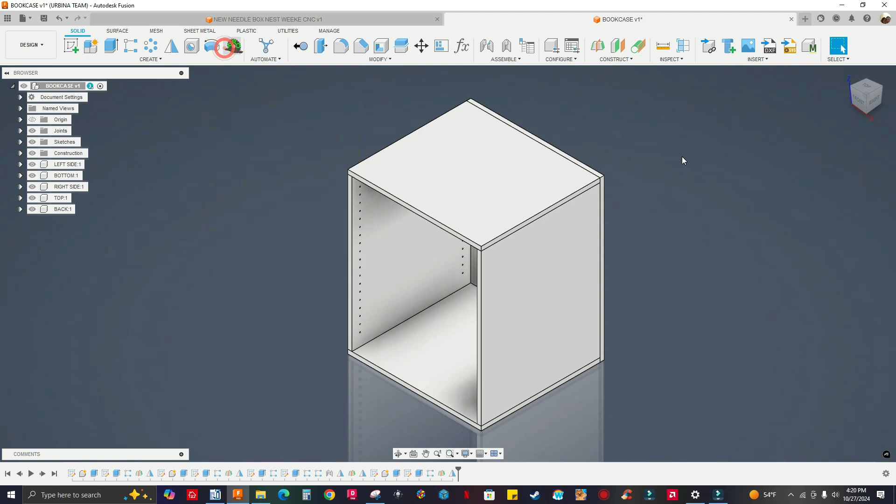Let me select MapBoards Pro. I'm gonna size the sheet 4 by 9 - excuse me, 4 by 8. Should be 48, not 49. 4 by 8. Okay, I'm going to options.

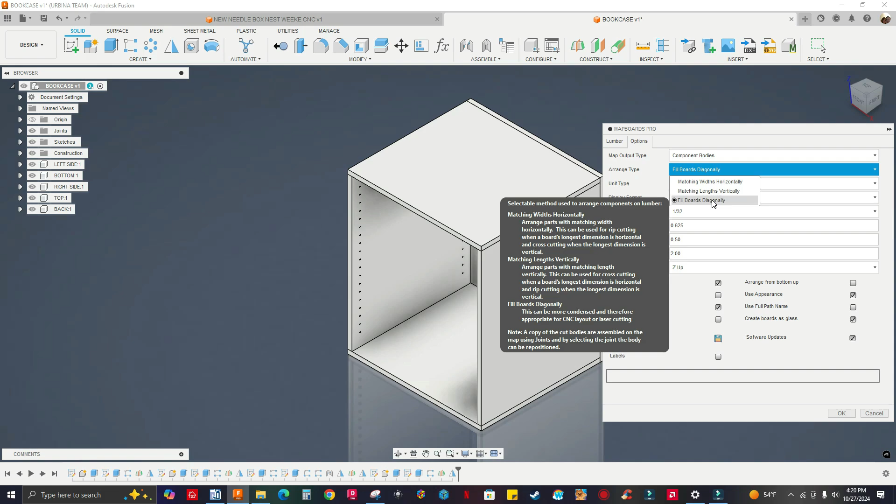I got everything saved as default. The map output type is component bodies, and then I have arrange type fill boards diagonally. This is for CNC or laser cutting.

And everything else is here: 5/8 spacing for component spacing. I have the trim on board edge, half an inch, and then the space between boards is 2 inches. Everything else is checked.

So when you have everything that you want, you can just save as user default. So next time you open MapBoards Pro, you're gonna have everything there. You don't have to make changes again.

Let's go to options and let's create labels for this part. Let's say I want to do a cut list - save cut list. I'm gonna select a different font, it's gonna be Arial Black. I'm gonna increase the dimensions height to 2 centimeters.

And then component label height is gonna be the same, and the same for board label height. What else do I have to do here? That's it. So let me click OK.

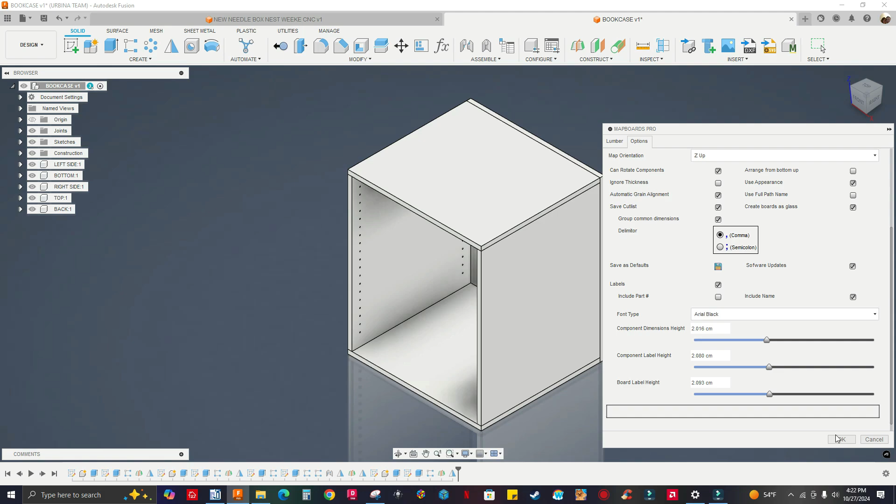I gotta save this cut list. It's gonna save it as a CSV file. So save. Now it's creating the map, and there it is.

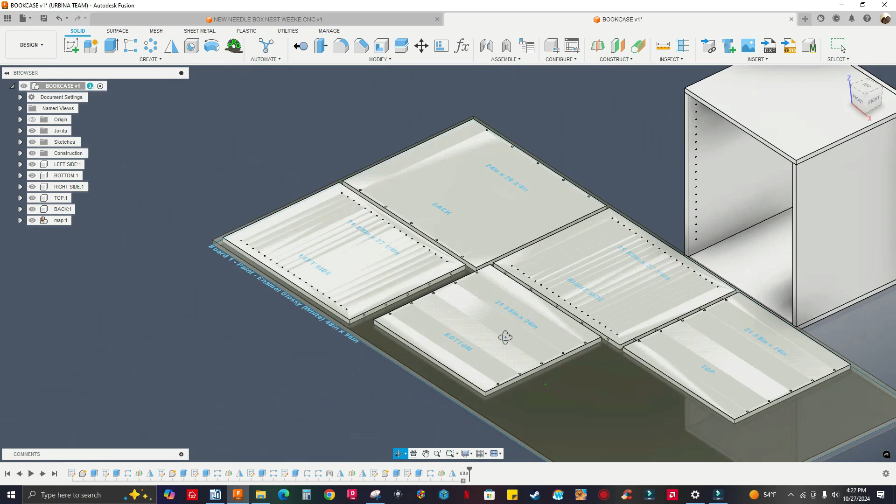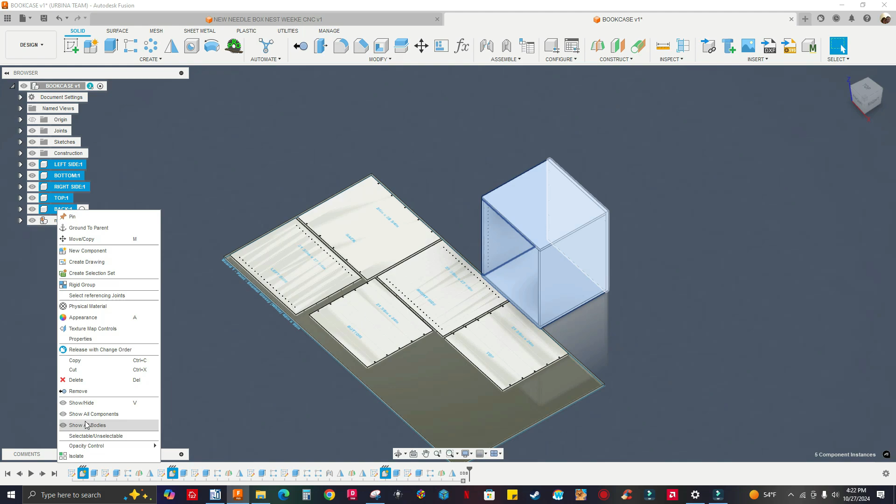Okay, there it is. So I can turn off the bookcase if I want to, and select every single component here. Select the first one, left side, hold down Shift, select back, right click, and just show/hide. Or you can select map one and then isolate. I do this when you have a lot of components to turn off, so I just isolate map one. It's just faster like that.

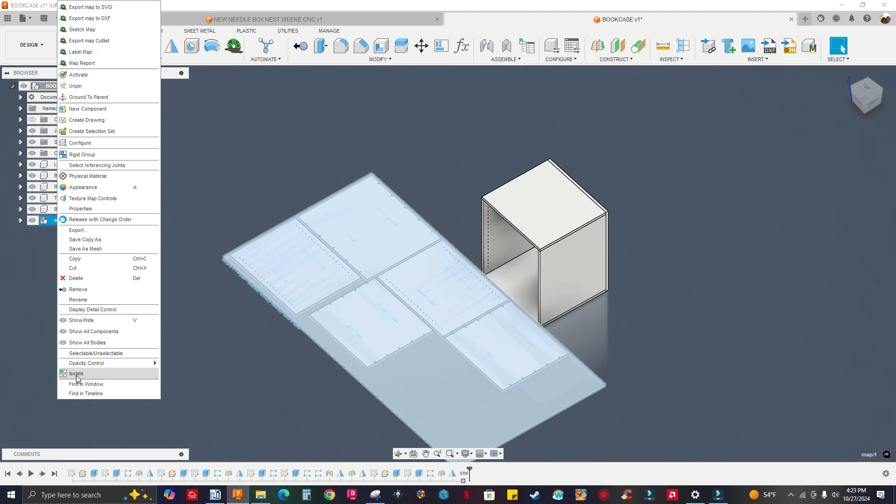Let me isolate map one. I just want to see this part laying flat. And you see the labels on the parts. Okay, that's great.

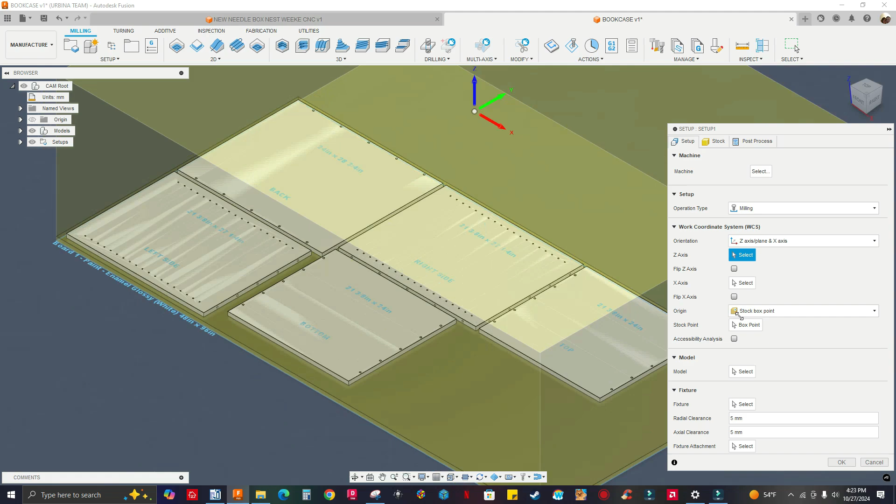Now let's go to manufacture workspace, and I'm gonna create a setup. I'm gonna do the back first. So I'm gonna go down to model, click on select, select the back, go back to Z-axis. But before that, orientation - I'm gonna go from X-axis to Y-axis, the second one here. So what's my Z-axis? This face.

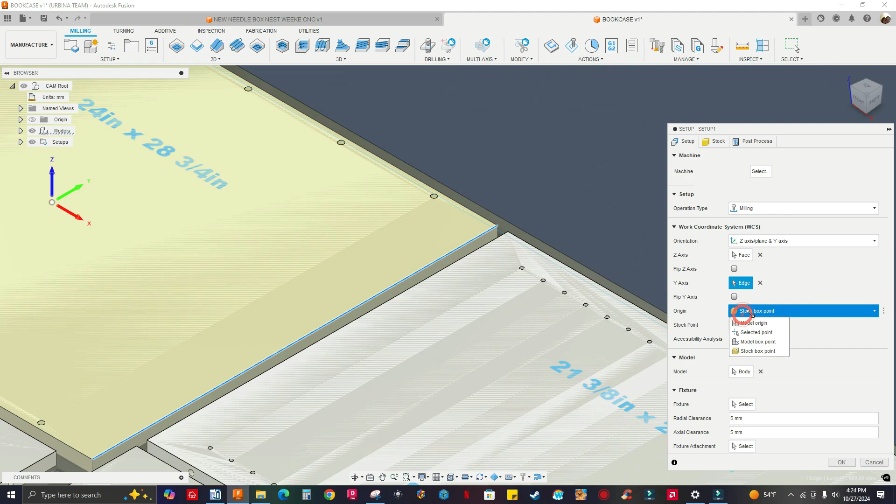My Y-axis, this edge. I got stock box point, select it, click on box point, zoom in. I'm gonna select this point right there. I'm gonna have to flip the Y-axis arrow - just click on it to flip it, or you can just check on this box to flip it as well.

Next, stock - this is the size of the part. See, my manufacturer workspace is in millimeters. I'll change it to inches in a minute. Let's go to post process.

I'm gonna name the program back. I could type any program comment - let's say 10 millimeter. Oops, 8 millimeter holes. Click OK.

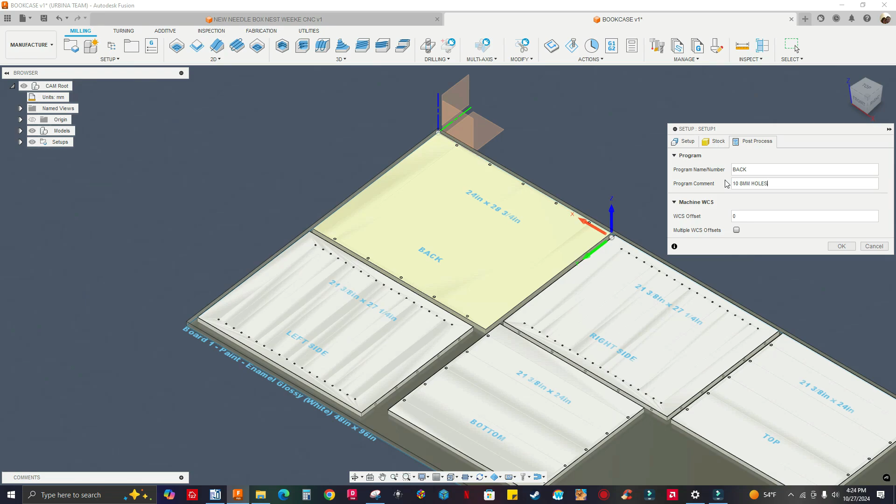Yeah, these are 8 millimeter. Let me check - select that edge, that hole. I'm zooming now, see, you see the bottom right on the screen is 8 millimeters. Okay, I can rename the setup one to back. Hit enter.

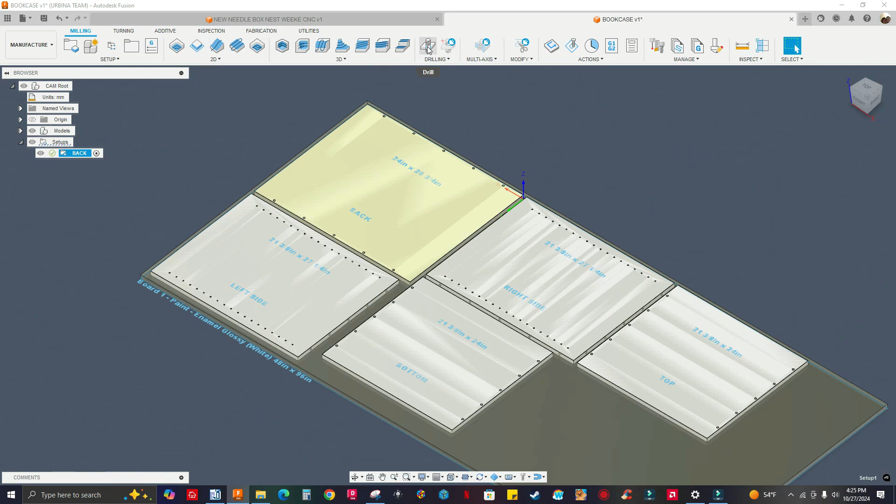Okay, now it's just drilling. Let me go to drill, go to drilling here. Drill, select my tool. Let's go to Weeke drill bits, brad point. Let me get that 8 millimeter brad point. Select, go to geometry.

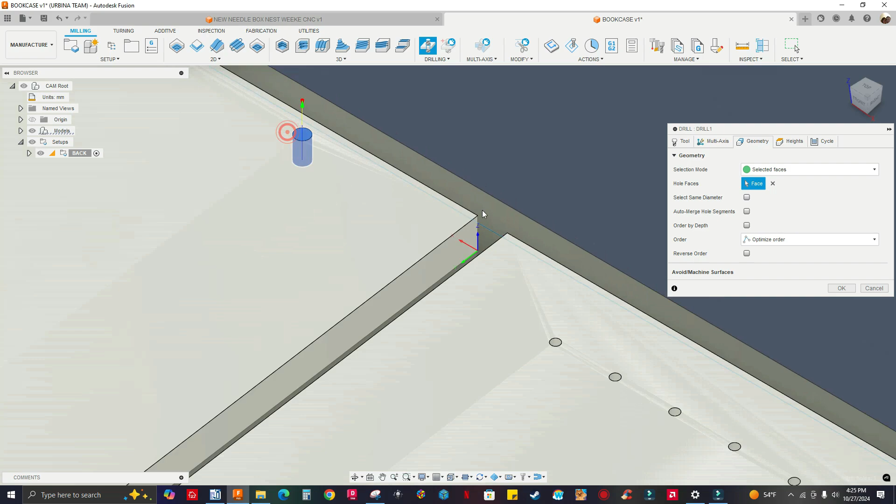I'm gonna select a hole face, that one. I'm gonna check this box right next to select same diameter. Next, heights tab, nothing to change here. Cycle type, this is the one that I use all the time. Drilling, rapid out. So let me click OK.

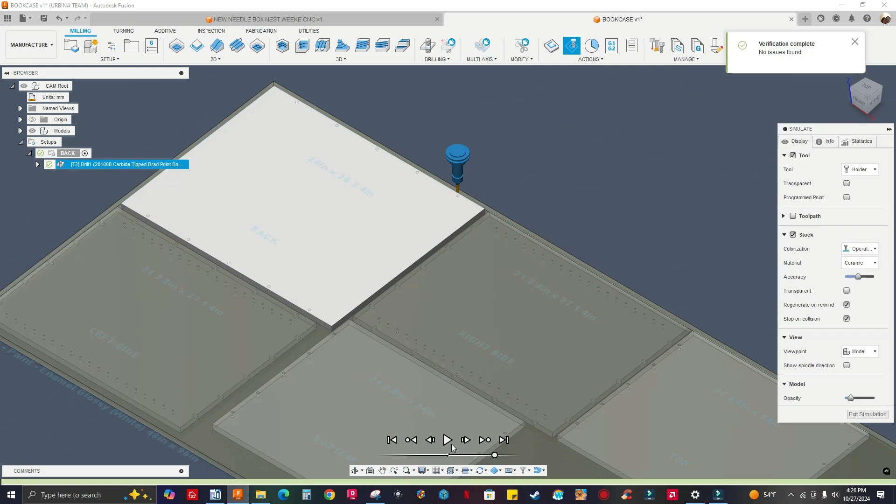And that's my first program. I'm gonna right click, simulate. That's it. Okay, let's go to the next one.

As you can see, the top and the bottom are the same because the holes are in the center. So I only need one program to make both bottom and top panels. So I can just turn this one off here. I just need one side panel to program, and that's for both right and left side panels.

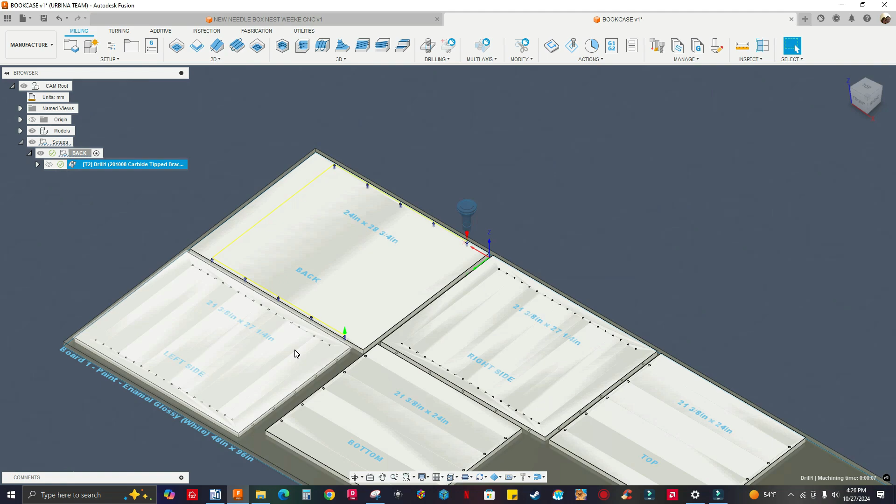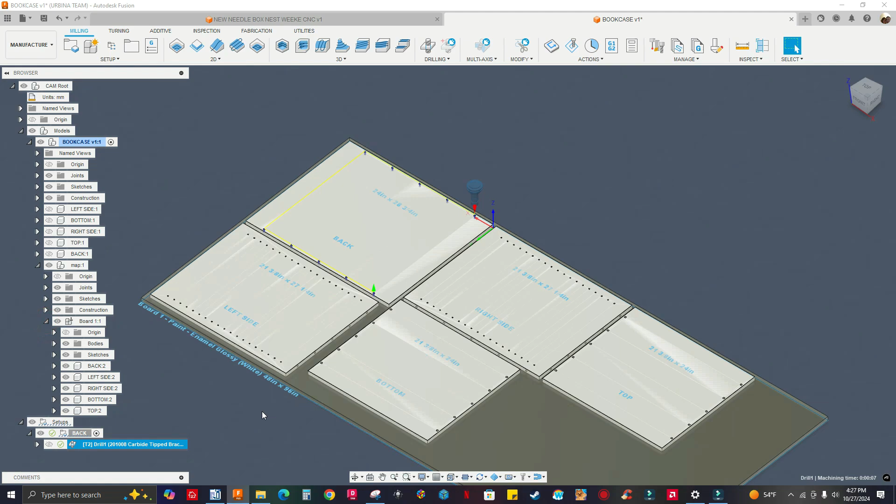So I'm gonna turn off this bottom right here and this side panel here. I can just go to models next to bookcase, click on this arrow to expand that. Let me go to map one, click on this arrow, let me go to board one, and I'm gonna have to turn off the bottom. Turn that off, and on the right side, right here, turn that off as well.

Let's say you don't want to see these labels. Just go to sketches, actually board one right here, and go to sketches. Click on the arrow to expand, just turn everything off. Okay.

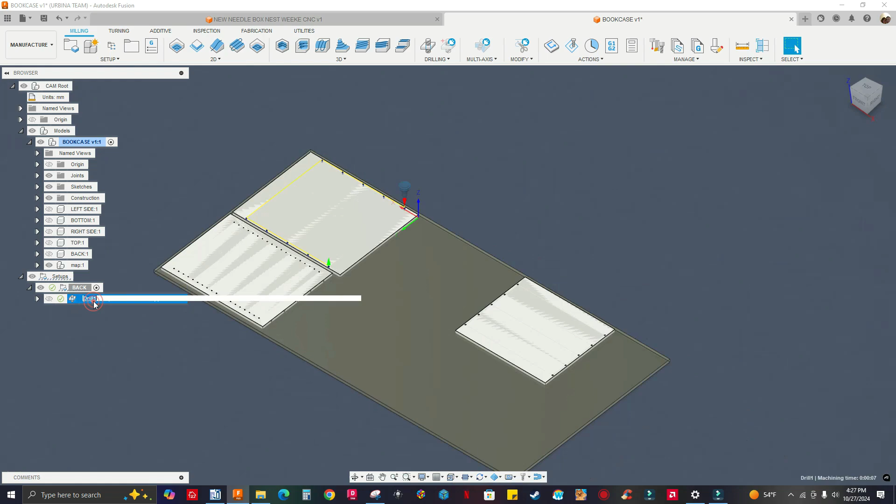Now let me program the side panel. You see, it has horizontal drilling. You see in the back, in the top or bottom, because this panel can be flipped, or it could be a left or a right.

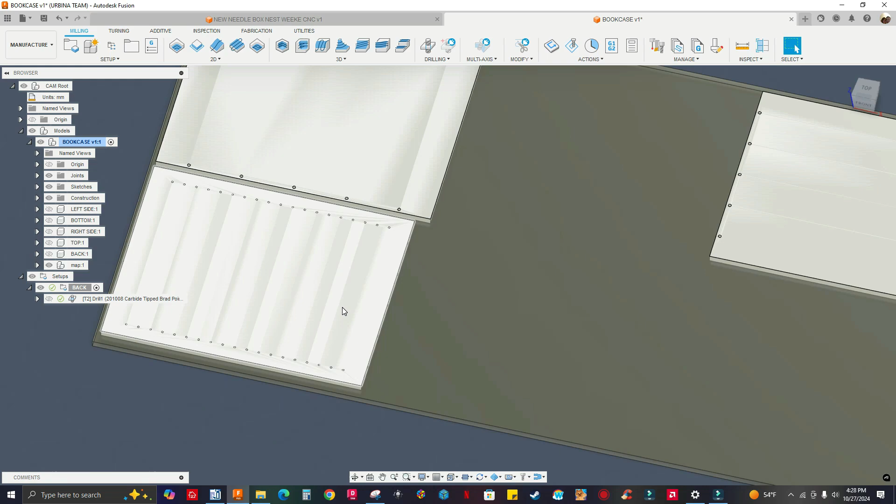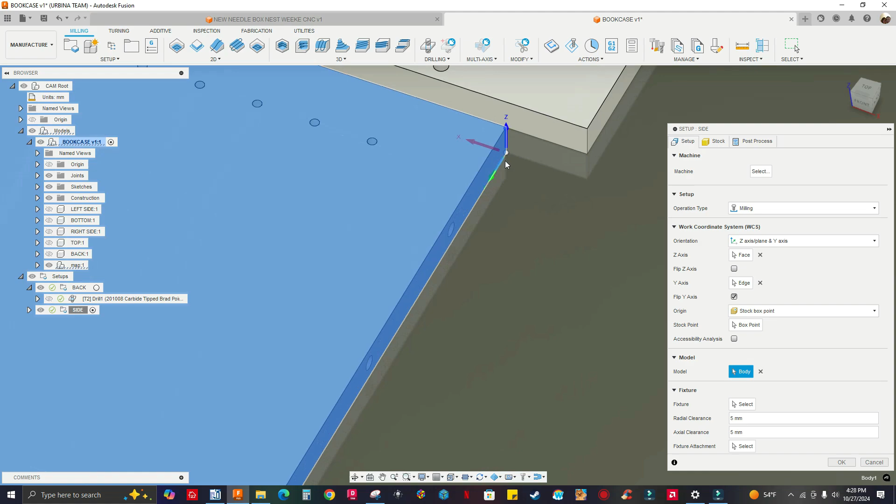So let me select back, setup, right click, duplicate, select that. I'm gonna rename it side. Hit enter, right click, edit. Right next to model, click on this X, select the model. That's where my WCS, this is where I want my WCS to be, right there. So I don't have to select Z axis or Y axis, they're on the same plane.

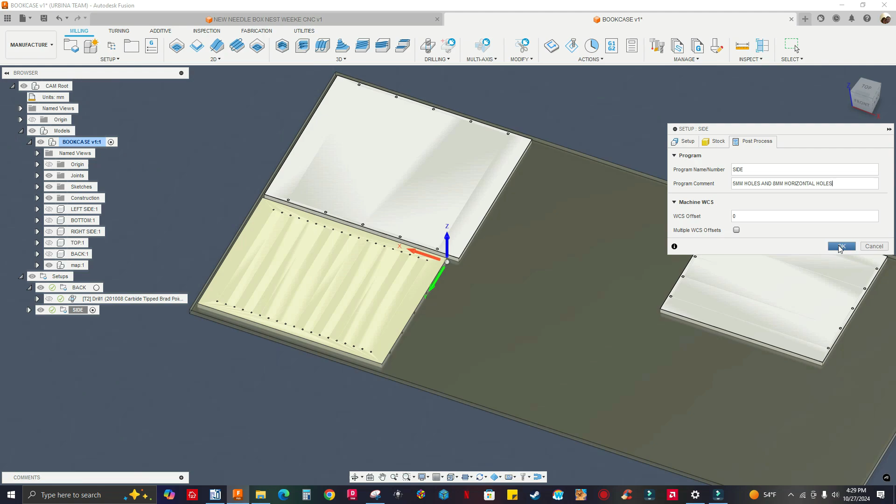So let me go to post process. I'm gonna name the program side. I can say 5 millimeter holes and an 8 millimeter horizontal holes. Okay, click OK. I'm gonna click on this arrow to expand that.

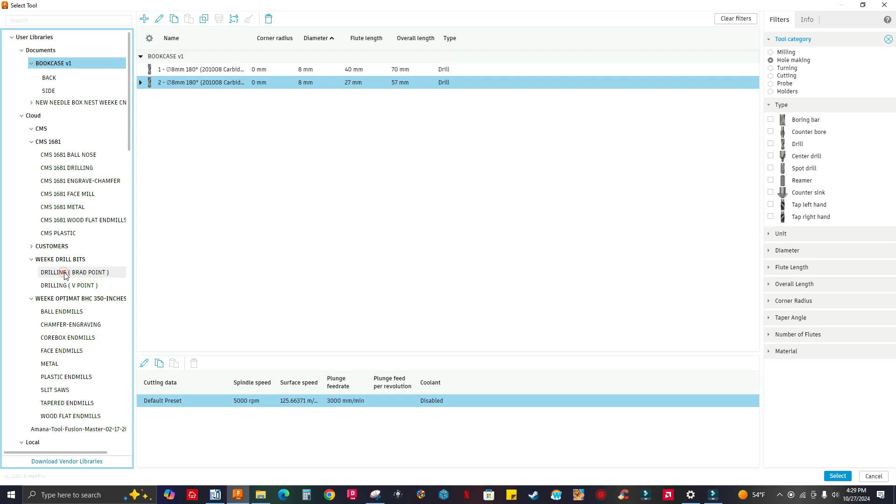Select that drill. I'm gonna use vertical drilling, but I gotta change my drill from 8 millimeters to 5 millimeters. So right click, edit, select my tool. Let's go to that drilling brad point under Weeke drill bits. Let me get 5 millimeter brad point.

Select, go to geometry, click on this X right next to faces. Zoom in, select this face. Okay, let me click OK. Now let's do horizontal drilling.

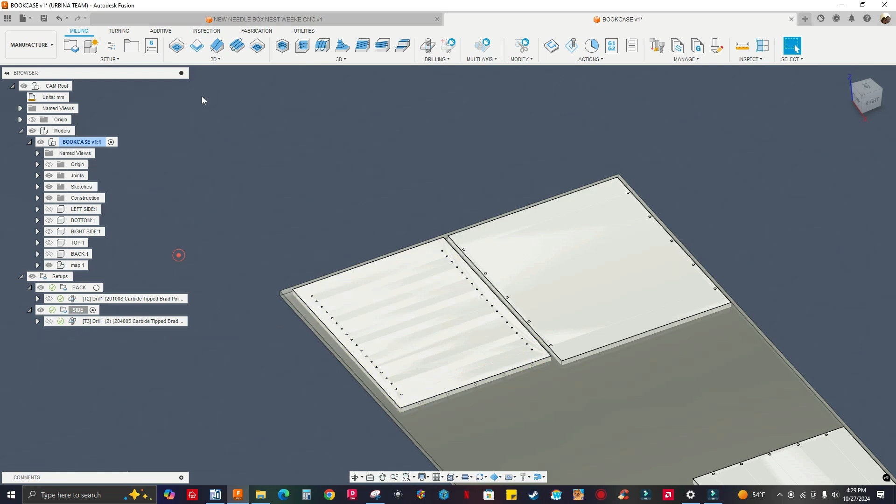All right, let me go to, I can select this one right here as well. I can duplicate it, right click, duplicate, right click on the second one, edit. Let me select my tool, which is going to be an 8 millimeter brad point, which I have right here. Okay.

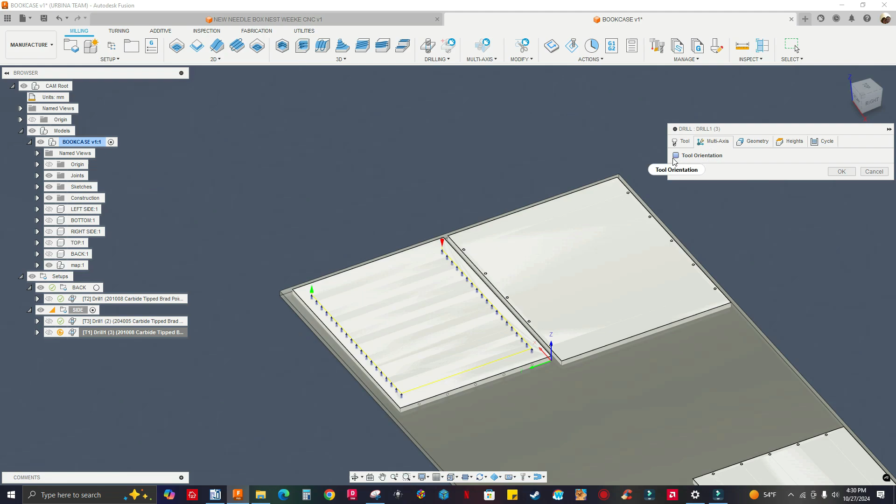Select that and go to geometry. So actually multi-axis, tool orientation. And this is only available for the pay version, okay? Not for the free version. So you gotta keep that in mind, all right? Check on this box, my z-axis.

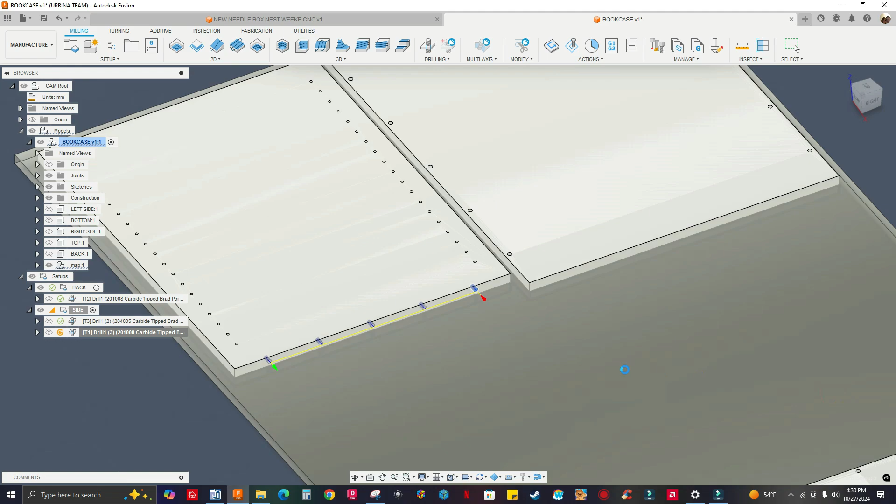Let's do this one first, these holes. So let me select that face, okay, and geometry. Click on this X, zoom in, select this whole face, click OK. Okay, there it is. Let's go to the bottom or the top holes right here.

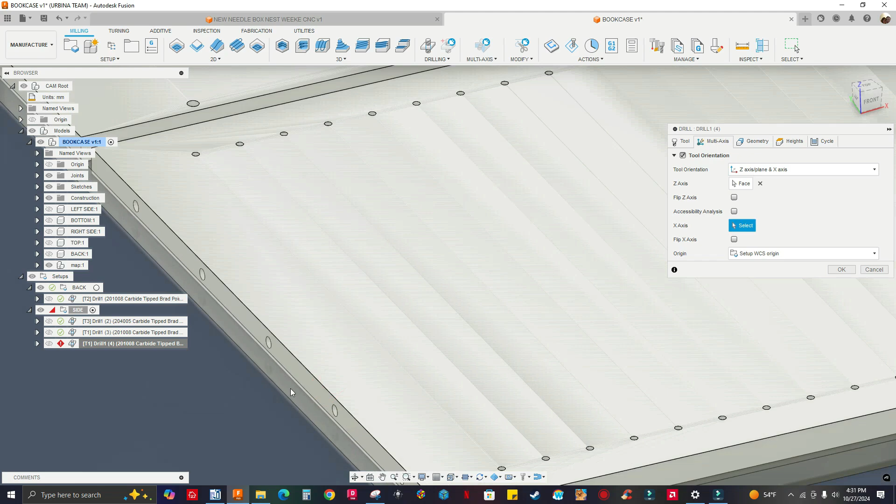So I'm gonna right click, duplicate, select the second one, right click, edit. Let's go to multi-axis, what's my z-axis? Click on this X, it's gonna be this one right here, that face. Okay, let's go to geometry, clear out the selection, zoom in, select this hole, click OK.

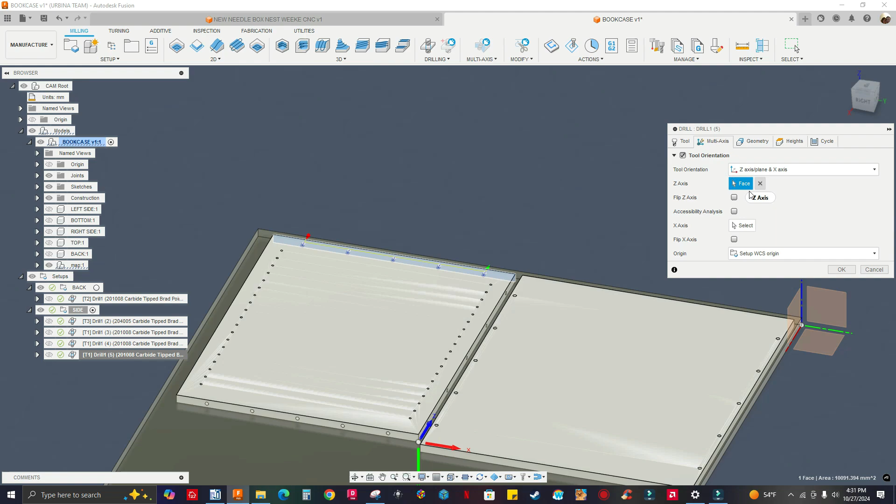All right, now let's do the last one, the holes in the back, where the back panel is gonna go into. All right, same thing, right click, duplicate, or Ctrl+D on your keyboard as a shortcut. All right, select the last one, right click, edit, geometry, actually multi-axis, keep forgetting about this. Okay, click on this X, my face, this face, geometry, click on this X, select this whole face, click OK, and there it is. Just right click, simulate.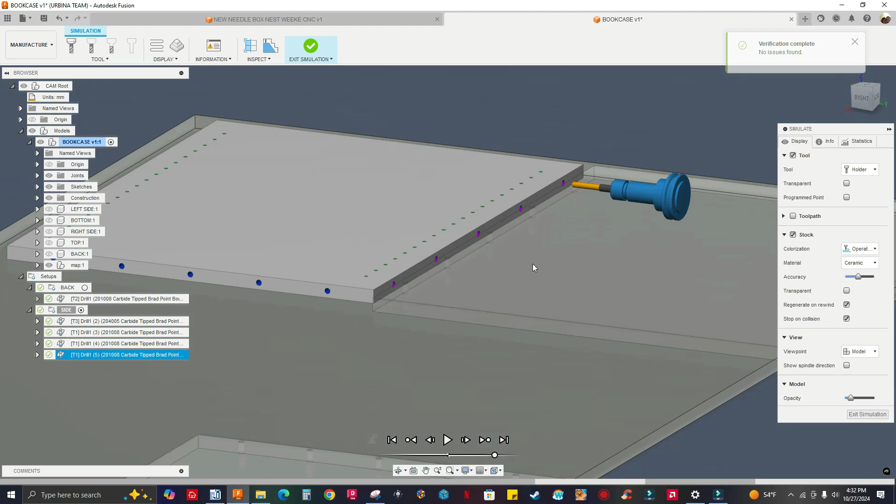Okay, see that? So this is programmed. I'm gonna hit escape on my keyboard to exit. Let's go to the last part, which is the top or bottom. I'm gonna duplicate. I have a side setup selected. Control D to duplicate. Rename the setup to top dash bottom. Hit enter. Right click.

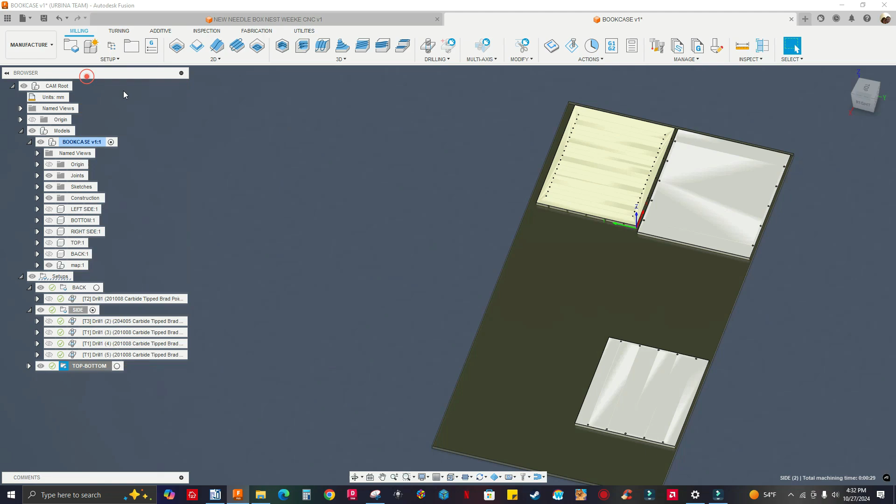Edit. Let's go to body right here. Model body. Click on this X. Select this one right there. Okay.

I don't have to do anything else here. So let me go to post process. Name this top underscore bottom. I can say 10, 10, 8 millimeter holes. Click OK.

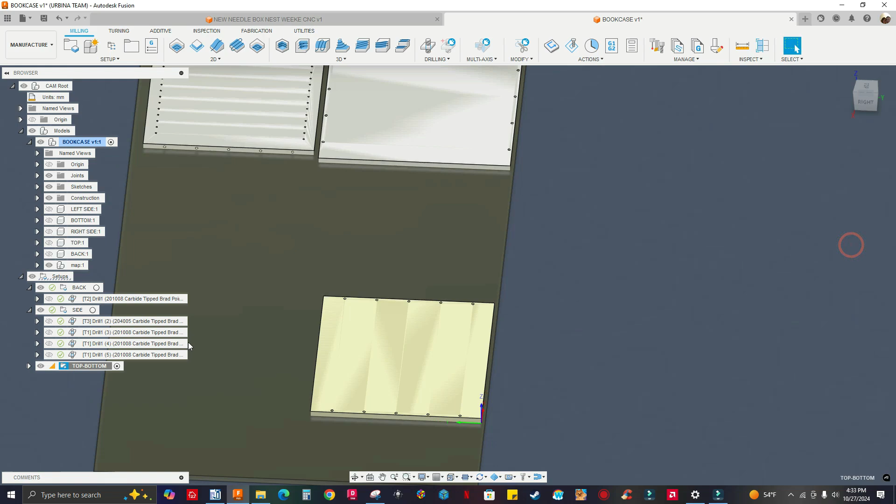Click on this arrow. Select the first one. Yeah, select the first one. And actually, I can use the 8 millimeter one. So select the second one.

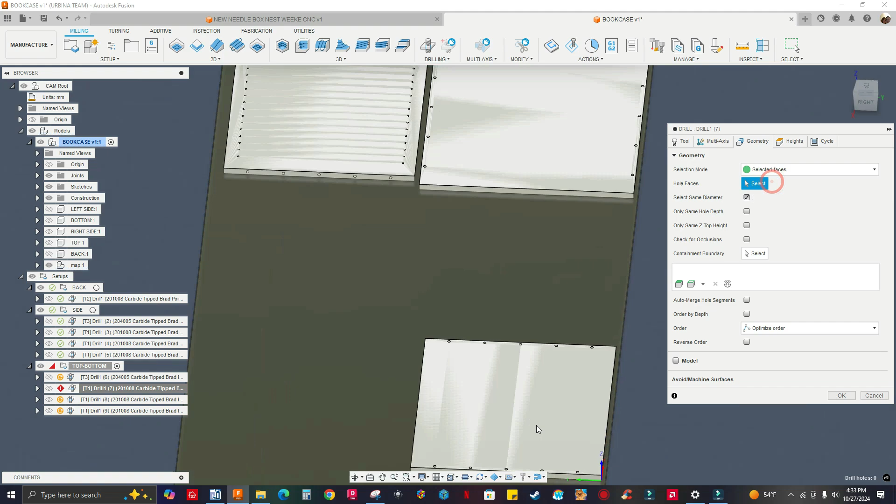Right click. Edit. Tool orientation, that's gonna be unchecked. Geometry, click on this X. Zoom in, select that face. Click OK. I'm done. So I'm gonna delete everything else.

So I got the first one selected. I'm gonna hold down Control key on my keyboard. Select this one and the last one. Right click. Delete. There it is.

Now I'm ready to post process these three programs. All right, let's do the back one first. Right click. Let me change the unit from millimeters to inches. Click OK. Oh, so I made the changes, so I'm gonna have to regenerate a toolpath.

That's okay. So I can select the back. I'm gonna hold down Shift, select the last one, right click, generate. So you generated all three setups at the same time. All right, okay, so let's post process the back.

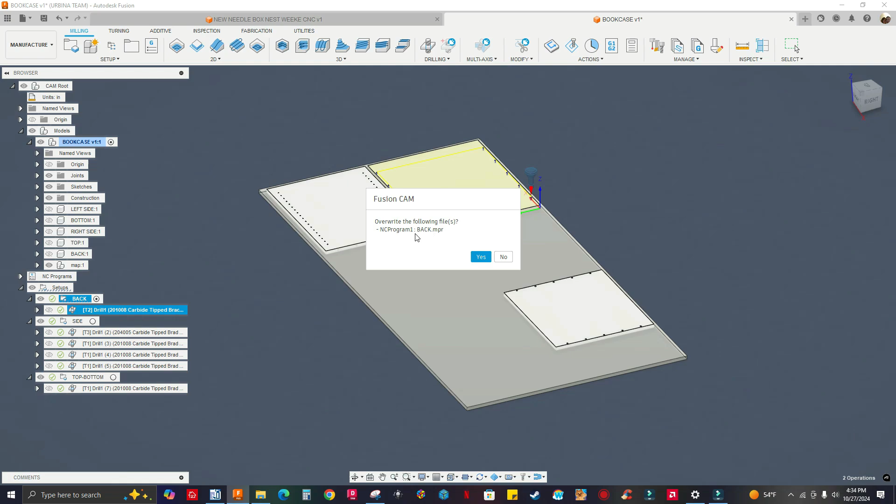Right click, post process, woodWOP inch, post processor, post. I already have an NC program back. It's fine, let me overwrite that.

Next one, side. Right click, post process, post. Top bottom, right click, post process. Yes, I want to overwrite it.

Let's go to woodWOP 5.0. File, open. So top and bottom first. Okay.

Now let's select the second one, side. Okay, you see vertical drilling and horizontal drilling. So this is really nice. All right.

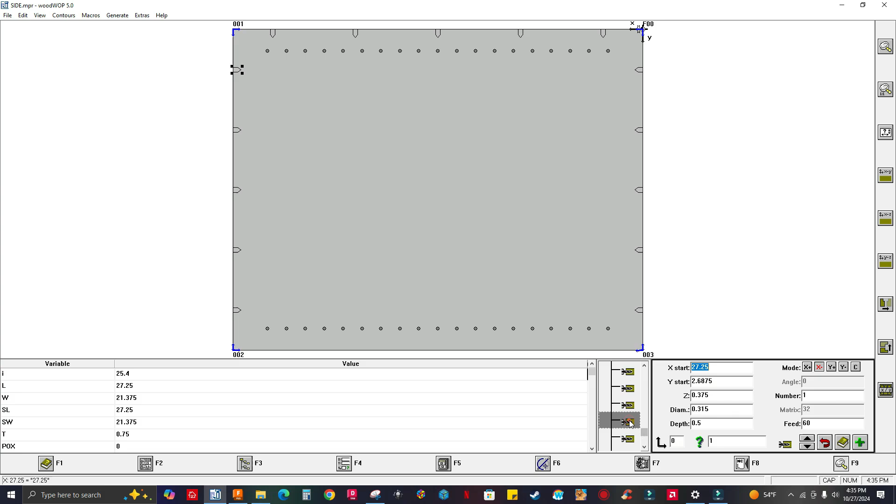Last one, file open, the back open. That's it, let's check the report. Well, I didn't post it yet. So let's go back to Fusion.

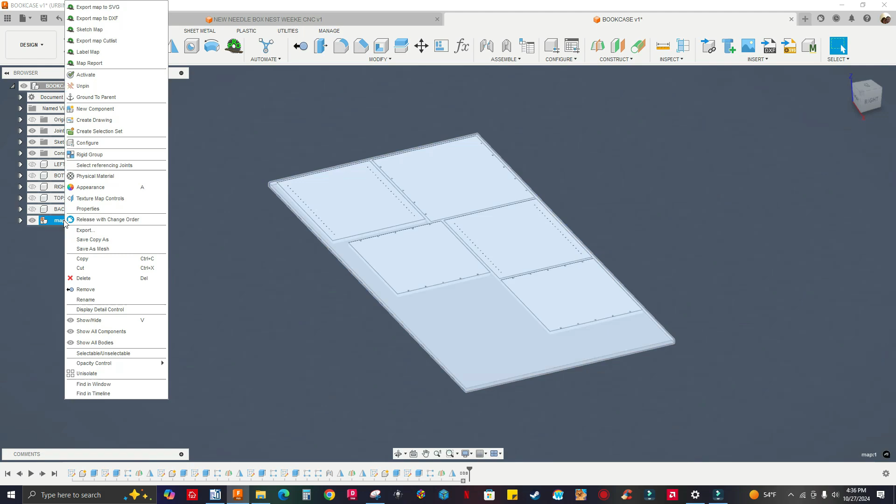Let's go to design. Right click on map one. Map report. It's gonna create that map report. So you see all the, I can change the colors for one. Okay, let's just click OK.

And yeah, it's gonna be Bookcase. I already have a folder on my desktop, so it's gonna save as an HTML file. So let me save that.

So it took me to the website. Click on map board one. There it is. Okay, go to cut list.

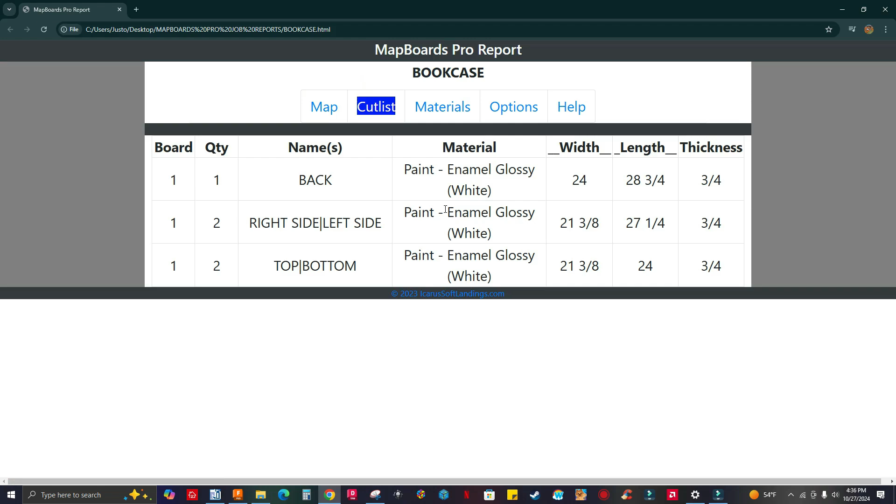Let's go to options. These are all the settings that I use. Help, it tells you how to make a MapBoards report and what it is. All right.

Let's go back. All right, so let's go back to Fusion.

And that's it for this video, guys. That's all I wanted to show you. All right, I hope you guys found this video helpful, and I hope you guys enjoyed this video.